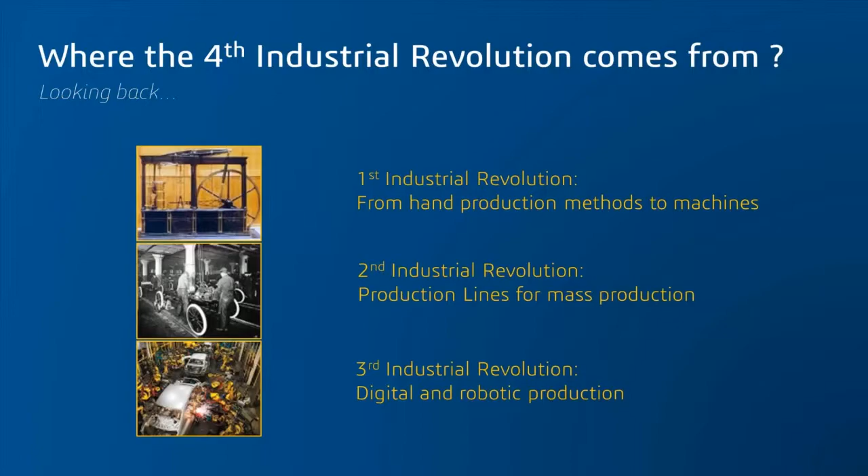The mid-20th century was characterized by a new production organization driven by the need for more efficiency. This new production line was well illustrated in the automotive sector. At the end of the 20th century, we saw the emergence of full process automation, executed by intelligent machines and piloted by digital product definition and manufacturing automation. And what about the 4th industrial revolution?

Today, our way of life presents significant challenges. We collaborate with people we don't even know. TV, smartphones, and maybe our watches are connected to the internet. We don't want standard products. Even our cars are customized to our tastes. And because we're always on the move, we need more and more services and support to make our lives easier.

With this evolution in society, manufacturing plays a key role. It's not only a consumer problem, it also has a major impact on the production system. Companies are adopting these trends and changing the way products are made. They are proposing products people are looking for. Let me speak a little bit about each aspect of this revolution and how it impacts your business.

Firstly, collaboration leads to social production, bringing all stakeholders together and creating machines or machine parts in a sustainable way. The way we collaborate is changing. Sending multiple emails is cumbersome. Many companies apply new social collaboration in their organisations to streamline the exchange of ideas, to promote working in groups, and making the decision process a smooth one.

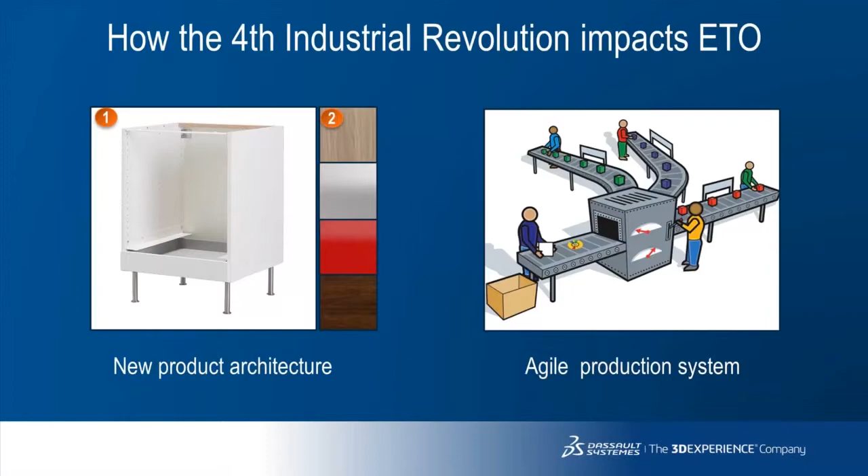Engineering to order is today's answer to provide the end customer with customized equipment. In a long-term vision, the ultimate goal is in fact to reduce as much as possible the demands on engineering and to create specific configurations by combining predefined modules. This configured-to-order methodology, as shown in this illustration, is the foundation on which companies can base the analysis of their full product cycle. This means modules are defined not only based on engineering needs, but can be driven by maintainability requirements or cost efficiencies. This can be considered as the methodology of the future in answer to highly variable demands.

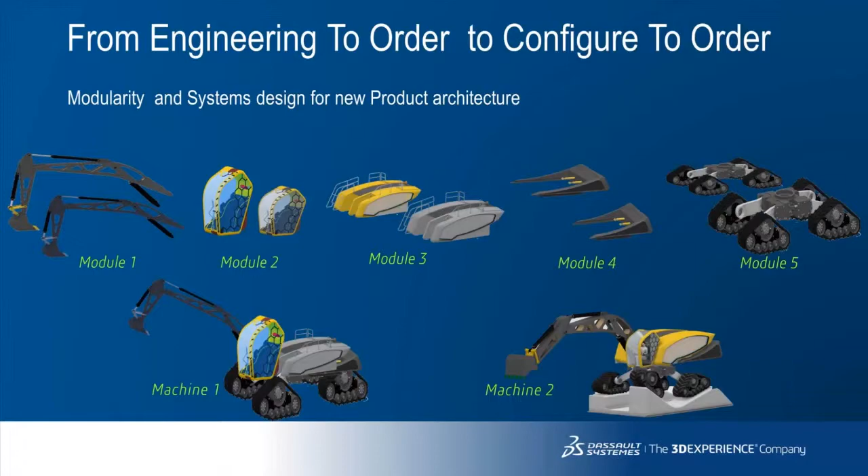ETO is in fact a process. It combines internal and customer-related processes. It begins with the internal process of innovation, piloted by customer demands and a long-term vision. This enables companies to create the product baseline, which will later help to build up the proposal. In fact, a lot of ETO efficiency is probably already established in this phase. A good product architecture will dramatically facilitate the design of a specific customer configuration.

As soon as the inquiry is received, the process can begin. Depending on the segment, this is typically a 6 to 18-month process for large press machines, for example. What is important is the TTA, time to acceptance. Yet once a product is delivered to a customer, there is still a period of time during which the client will test the product to check if it matches expectations.

What are the key challenges to execute this ETO process? Being fast and keeping control. There's no value in being fast if the quote or delivery is not what the customer expected. Balancing these two parameters is always a challenge.

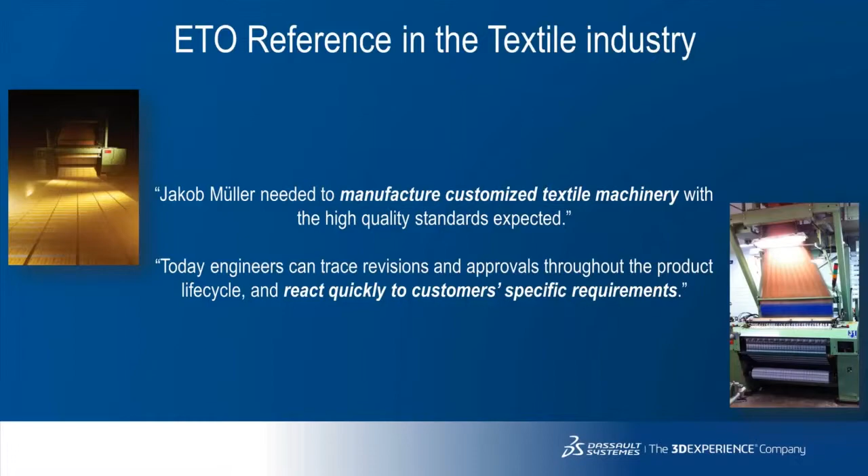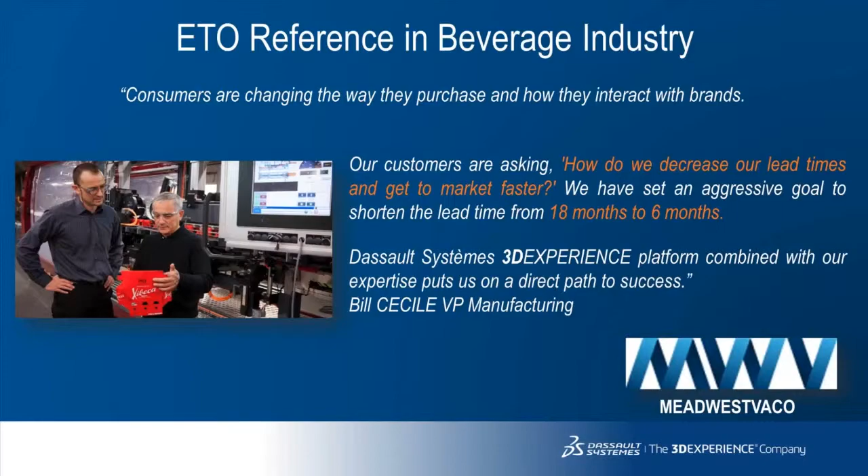Why? Because the package definition is totally connected to trends in consumer behaviour. Once this behaviour is understood, companies must react very quickly to design products that respond to those trends. Time to delivery is key and a huge competitive advantage.

Now that we've explained what ETO consists of and what the KPIs are to measure its efficiency, we'll now explain the 4 main objectives and what we consider as the 4 solutions to improve processes to establish an efficient ETO approach.

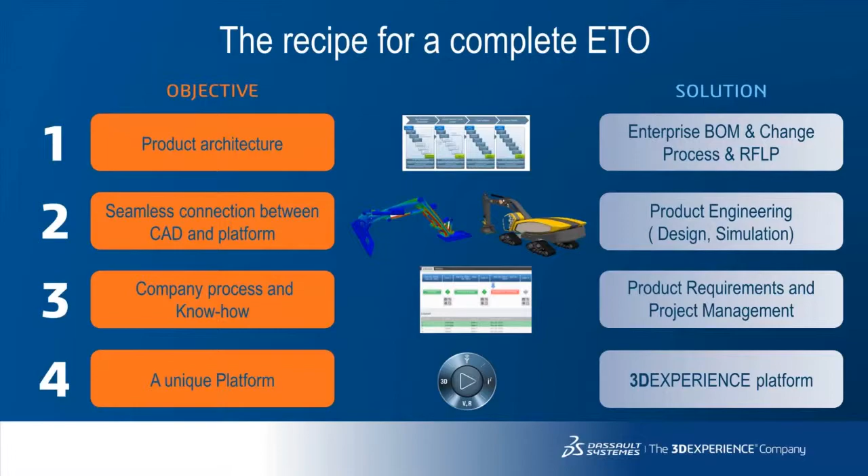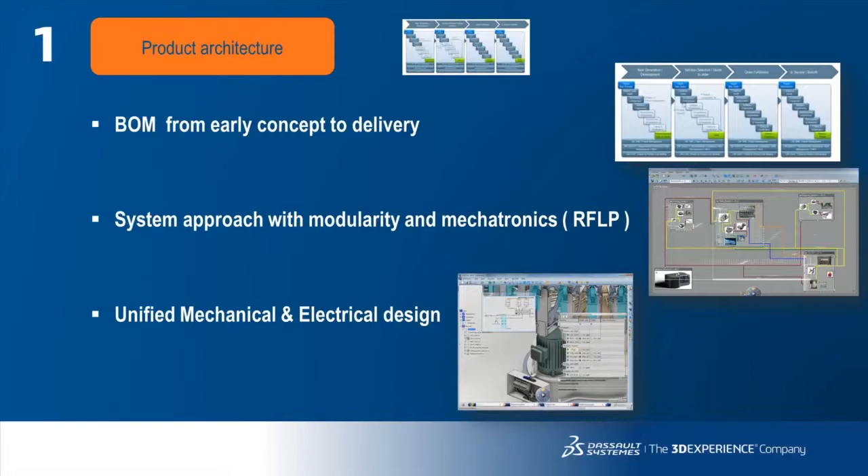To manage the product architecture, we see 3 main components: A, the efficiency of the bill of materials process; B, having a system approach; and C, finally having the ability to integrate different disciplines on the same platform.

Thanks to this multidisciplinary approach, you can now seamlessly connect design, simulation and manufacturing, which is critical to implementing your ETO process.

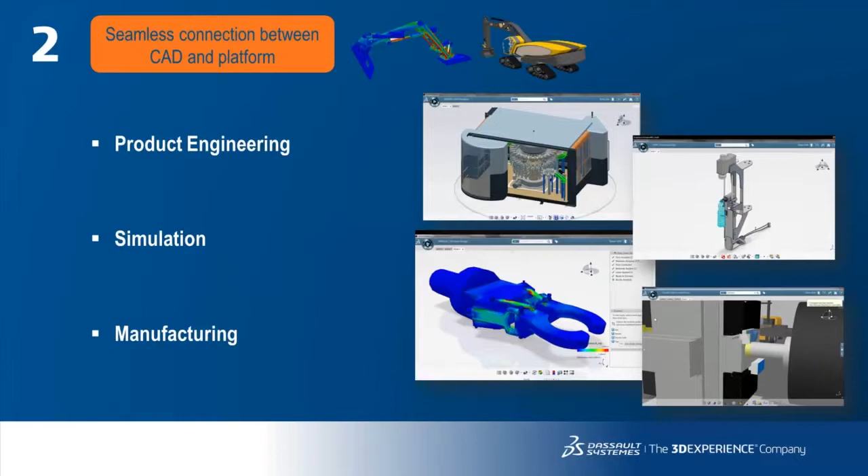As we previously explained, ETO is a process, and one of its advantages is the ability to capitalise on existing elements. As a result, this process is managed thanks to project management tools that are integrated in the ERP and potentially the CRM of your company.

As ETO projects are usually complex, companies often subcontract work to suppliers to install a machine or to produce machine components to save time and money.

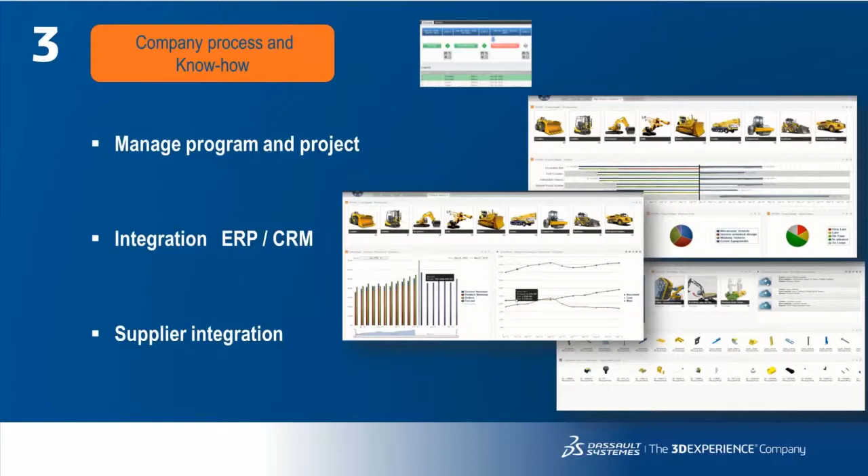As you can see, we're in a multidisciplinary environment that involves several sites, several expertises, and also external stakeholders, such as suppliers and even customers.

To manage this, we need to have a unique platform which will enable everyone to interact and work together throughout the entire project, enabling each to access the enterprise data and to build and consult dashboards to monitor and help with decision-making.

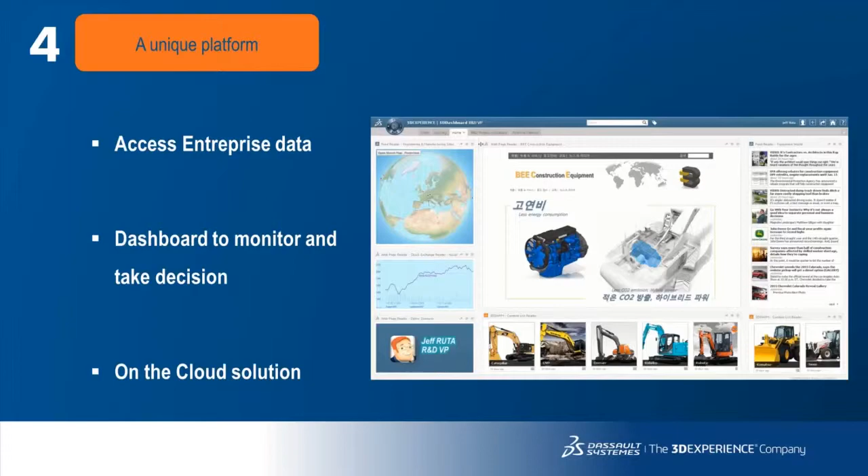To conclude this presentation, here are a few takeaways. The 4th Industrial Revolution drives companies to adopt new methods to address mass customization and production agility. To efficiently execute engineering-to-order processes, you need a single version of the truth. This requires having a business platform as a unique data source for all your company stakeholders.

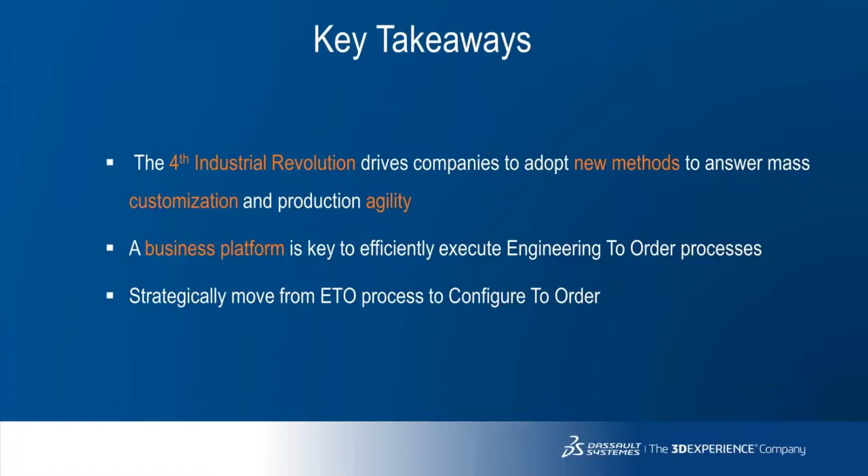Finally, the next challenge for industrial equipment companies, as it's been the case in the automotive industry in the past, will be to strategically move from an ETO to a configure-to-order process.